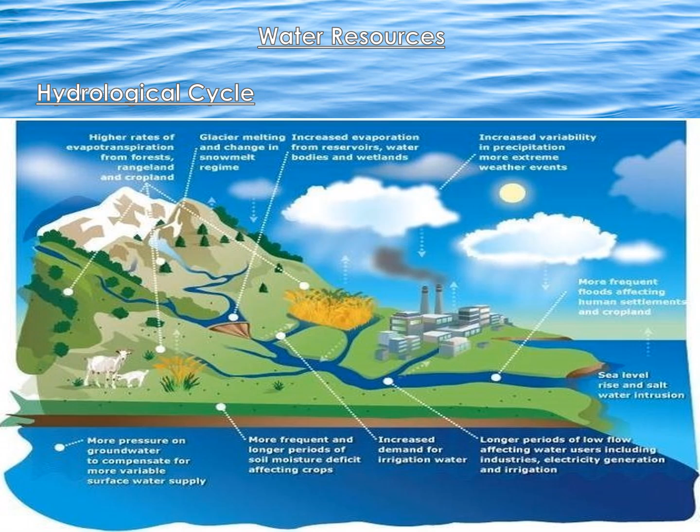In the picture, you can clearly see how the hydrological cycle actually works.

Now, if we talk about the importance of rivers to Pakistan, we can see that it attracts tourism due to scenic beauties, provides water to rain-fed areas, is used in various industries, and alluvium increases the fertility of the soil. It is important for the inland fishing industry, helps generate hydroelectricity, and is used for domestic purposes and for irrigation purposes.

Then, if we talk about the river systems of Pakistan, we have a very good river system. We basically have two river systems: one is the Indus water system and the other is the rivers of Balochistan.

Firstly, we'll talk about the Indus water system. It has two tributaries, two parts: eastern tributaries and western tributaries. The Indus water system is the largest river system of Pakistan, based on the largest river, the Indus.

It is watered by glaciers of the Karakoram and Hindu Kush, enters the plains of Punjab and Sindh, and irrigates about 60% of Pakistan's cultivable land. The Tarbela Dam is constructed on River Indus.

The eastern tributaries of River Indus are Jhelum, Chenab, Ravi, and Sutlej River. The western tributaries of River Indus are Kabul, Kurram, Swat, Tochi, and Gomal.

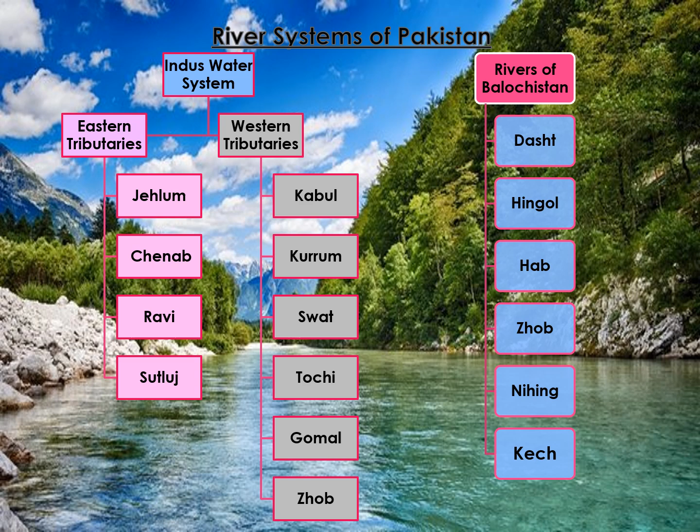The main rivers are Dasht, Hingol, Hab, Zhob, Nihing, and Kech. These are mostly small rivers or seasonal rivers, and they make up the rivers of Balochistan.

Then we have uses of water. We all know these uses, but I will quickly tell you about them. We can divide the uses of water into three domains: domestic uses, industrial uses, and agricultural uses.

In domestic uses, we use water for drinking, cooking, washing, and sanitation. For industrial purposes, we use water for the pharmaceutical industry, tanning, food processing, textile industry, chemical industry, mineral water, iron and steel industry, thermal power, and hydroelectricity.

Then, if we talk about agricultural uses, we use water for irrigation purposes.

Then, if we talk about groundwater, it refers to the water beneath the earth's surface. Pakistan faces water scarcity, making irrigation crucial for crop cultivation. Both ground and surface water are utilized for irrigation purposes. Tube wells, karezes, and wells tap into the groundwater, while canals, diversions, and sailaba are used for surface water. We are going to see these types in the later slides.

In arid regions like the Balochistan Plateau and deserts, groundwater is vital for irrigation in the absence of sufficient rainfall. Urban areas like Karachi experience water shortages due to population growth, leading to groundwater extraction for domestic use. Groundwater can be saline or sweet, being non-saline near recharge sources like rivers and canals.

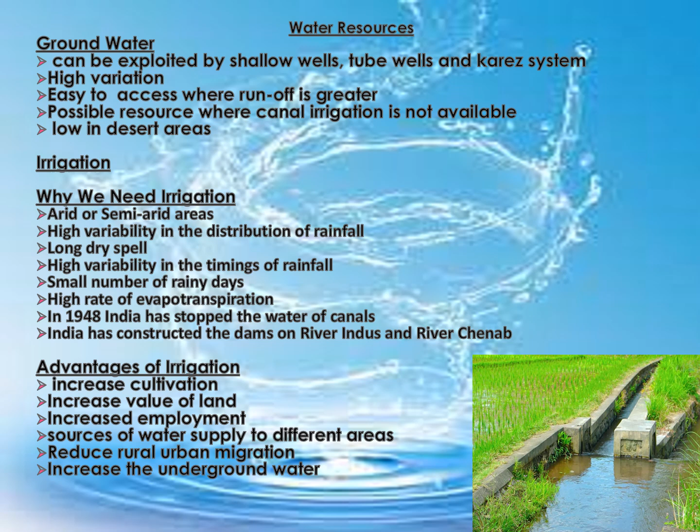If we talk about the disadvantages of irrigation: it is a supply-based system, operational and maintenance cost is very high, and it also causes waterlogging and salinity if the canals are not lined.

Now, if we talk about the factors leading to the development of the canal irrigation system in Pakistan, we can see that we have cheap labor, and availability of cement reduces the cost of canal construction. We also have an automatic natural southward slope of the rivers, which makes the construction of canals easier because water flows southward naturally.

Huge quantities of water from monsoon rainfall and melting of snow can be stored in reservoirs during the summer season. Irregular supply of water in the rivers is then regulated by construction of dams and barrages. Soft soil and level land of the Indus plain makes digging of canals easier than in the rugged lands of Balochistan.

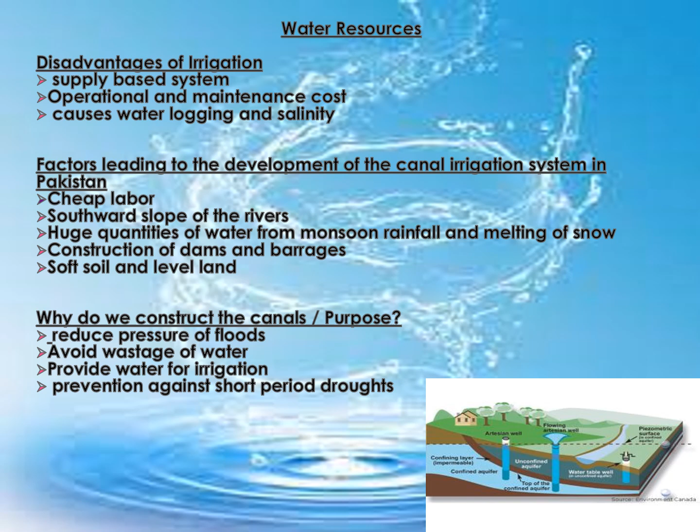So why do we construct canals? What is the purpose? To reduce the pressure of floods. We also use it to avoid the wastage of water and to provide water for irrigation. And also it takes a prevention method against short period droughts, so we can use this water anytime.

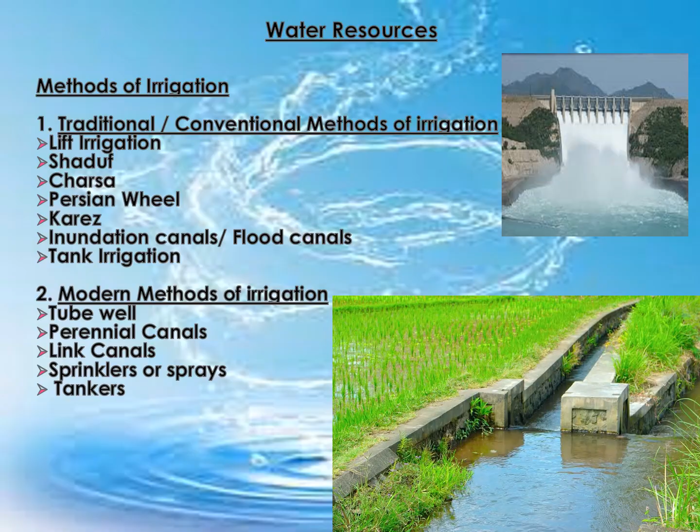Now, if we talk about the methods of irrigation, there are two methods: traditional methods and modern methods. In traditional methods, we have lift irrigation, shaduf, charsa, Persian wheel, karez, inundation canals or flood canals, and tank irrigation. In modern methods of irrigation, we have tube wells, perennial canals, link canals, sprinklers or sprays, and tankers. We are going to see them in detail.

First of all, let me tell you something about lift irrigation. It is among the oldest irrigation methods in Pakistan. In ancient times, water was manually lifted using buckets attached to ropes from shallow wells and ditches. Due to the labor-intensive nature of this method, only a limited land area could be irrigated using lift irrigation.

Let me tell you one thing: we are talking about the methods of irrigation, not the methods of getting water for domestic uses. We are just concerned with the irrigation methods.

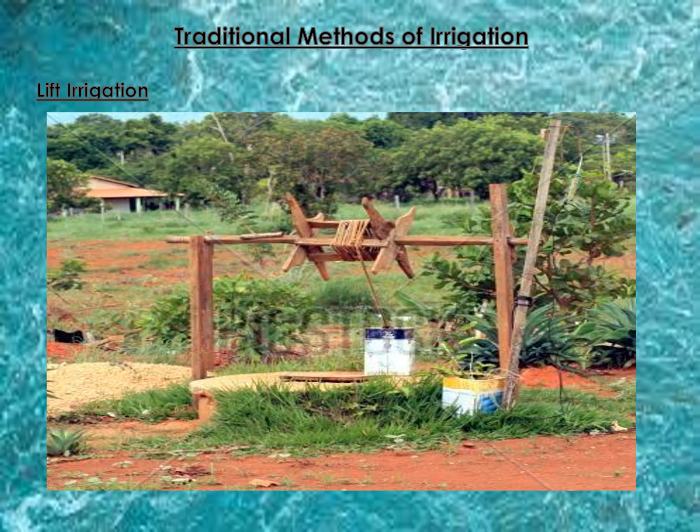So the second one is shaduf. The shaduf is a traditional irrigation tool comprising a pole with a suspended bucket on one end and a weight, such as a rock, on the other end.

The pole is supported on a Y-shaped post near a well or a river bank. The bucket is manually dipped into the water and the weight aids it lifting again. Due to its labor-intensive nature, this method is outdated and only a small area, approximately 1/10 of a hectare, can be irrigated with this effort.

Now, if we talk about charsa, animal-powered irrigation involves using animals to pull a bucket suspended by a rope through a pulley near a well, as you can see in the picture. This innovation allows for the extraction of water from wells at depths ranging from 5 to 7 meters. With the assistance of animals, a larger area could be irrigated using this method.

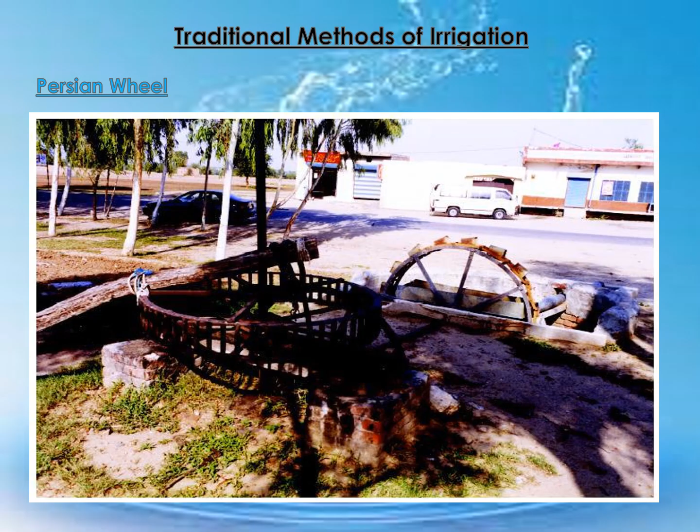Now, Persian wheel involves lowering a series of buckets into a well on a chain, ensuring a continuous water supply. Hundreds of empty buckets descend into the well and emerge filled with water in a cyclical manner. This method allows access to water at depths ranging from 23 to 26 meters and is typically powered by a pair of bullocks or camels.

Alongside the charsa, the Persian wheel is one of the dominant and long-lasting lift irrigation methods in Pakistan, utilized for several centuries, and still used in some of the villages of Pakistan.

Now then we have the karez system. The karez is an underground water tunnel that originates at the base of a hill or a mountain, tapping into groundwater, extending to 1 to 2 kilometers and sometimes up to 10 kilometers.

The karez serves to irrigate orchards and agricultural fields. Vertical shafts along the length of the karez facilitate cleaning, repairs, and water extraction for domestic use. Regular maintenance ensures the karez remains productive for a century or more.

Typically owned collectively, the water distribution is based on individual shares held by the group of owners. Site selection is done by experienced villagers, and the digging and maintenance involve a group of trained labor. The main challenge with the karez is the inability to stop water flow, and the maintenance proves to be a challenging and expensive task.

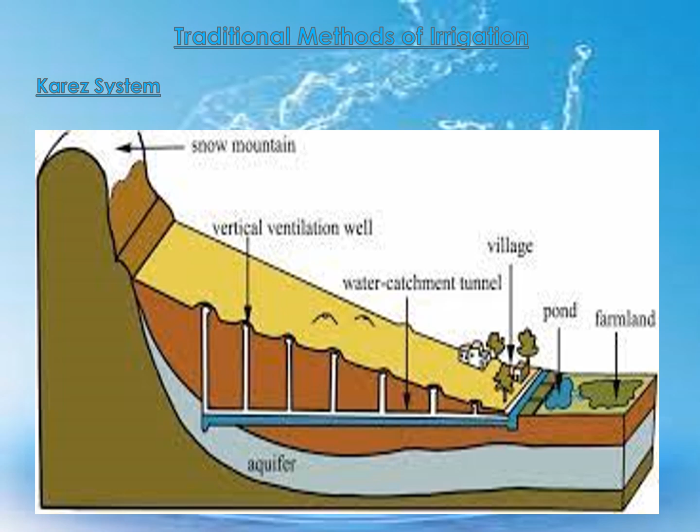If we talk about the advantages, continuous supply is there, but it is less important now due to lack of government investment. Now, next, we have to see the inundation canals or the flood canals.

These are the seasonal canals, designed to provide water to fields during the summer, typically operational during the rainy season and closed in winters. These canals provide advantage for the kharif crops.

Rabi crops benefit from the residual moisture left in the land after the summer flooding. These canals specifically irrigate active floodplains with a good level of water, and the primary network of these canals is in Sindh and southern Punjab regions.

Now, if we talk about the advantages of these canals, they are made to reduce the flood pressure and are useful for lower areas like Sindh and southern Punjab.

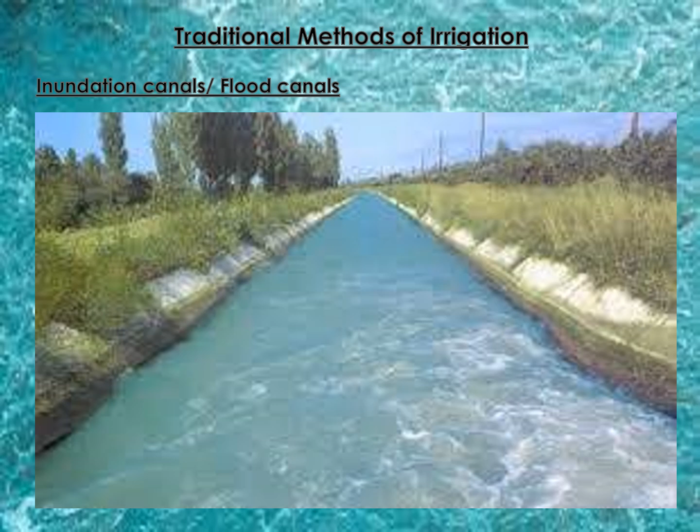Now, if we talk about the disadvantages of these seasonal canals, they do not supply water throughout the year because they are seasonal, and only a single crop can be cultivated with these canals. They also do not supply water to the upland areas in the northern Indus plains or upper Indus plains.

Now, if we talk about tank irrigation, it is a method of providing water for agriculture by storing it in artificial reservoirs or tanks, which are filled during the rainy season and then used to irrigate crops during dry periods.

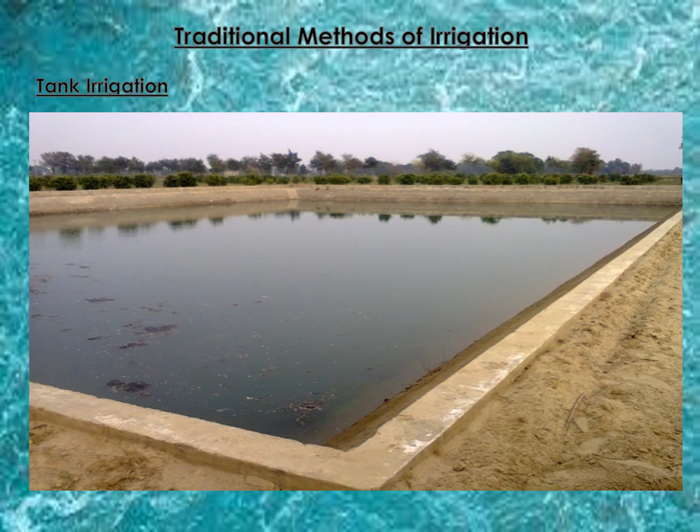Now, let's study about the modern methods of irrigation. Number one is tube well. They represent a relatively recent inclusion in Pakistan's irrigation infrastructure. It is capable of accessing water at depths of several hundred meters.

These wells are powered by diesel or electric motors. Tube wells play a very crucial role in lowering the water table and safeguarding the land from issues like waterlogging and salinity. If the land is waterlogged or salinated, which I am going to explain later on, tube well installation in that area would help to lower down the water level.

There are many advantages of the tube well. For example, it is more efficient, it is faster, a larger area can be irrigated, there is regular supply of water, cleaner water supply would be there, it reduces water logging and salinity, and less labor is required.

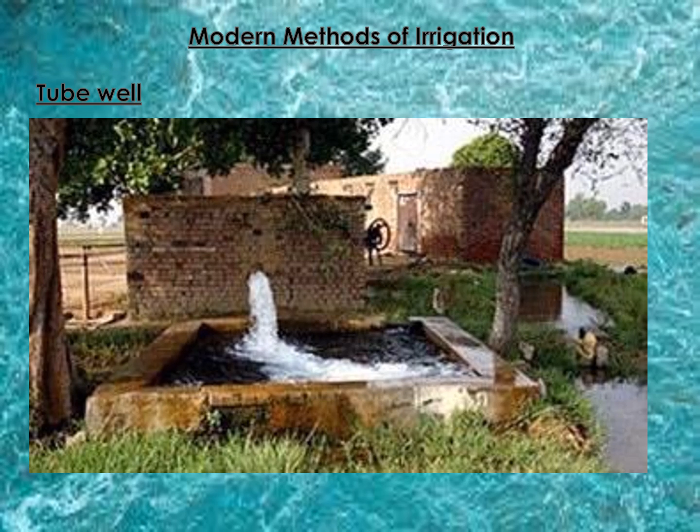But there are some disadvantages of the tube well as well. For example, it is expensive, cannot be used by poor or subsistence farmers, maintenance is very difficult and expensive, and the fuel, diesel or petrol, is expensive. Spare parts are also expensive. It reduces the groundwater and lowers the water table.

Then we have perennial canals. These canals bring water to the fields throughout the year and are useful for both crops. These canals have been taken out in bar upland areas from the dams and barrages. They have some advantages like supply of water around the year. Both crops are benefited, like Kharif and Rabi, both crops provide water to the higher areas.

And they have two types. Number one is lined canals. Lined canals are paved with cement or brickwork on the bed and the sides.

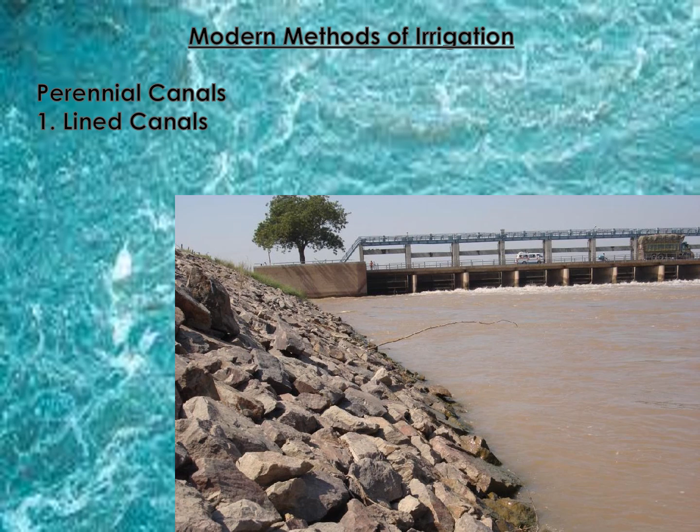Number two are the unlined canals. These canals are without any brickwork. Their bottom and sides are of earth and soil, and that is why it is a major cause of waterlogging and salinity. Disadvantages may include that it raises the water table to the surface level and creates waterlogging and salinity, as I just told you.

Then we have link canals. These canals carry water from one canal to another. As its name depicts, a link canal links different rivers from another river, and it is used to control irrigation purposes. If in some river there is less water for irrigation purposes, link canals could be used to take water from another river so that the area would be irrigated.

For example, if there is less water in the Ravi river, the Qadirabad-Balloki link canal can take water from the Chenab river and put it into the Ravi river, so that this area of Ravi can get water for irrigation. So we have different link canals like Rasul-Qadirabad, Balloki-Sulaimanki, Marala-Ravi, Bahawal, Taunsa-Panjnad canal. We have many link canals, which are very good for our irrigation system.

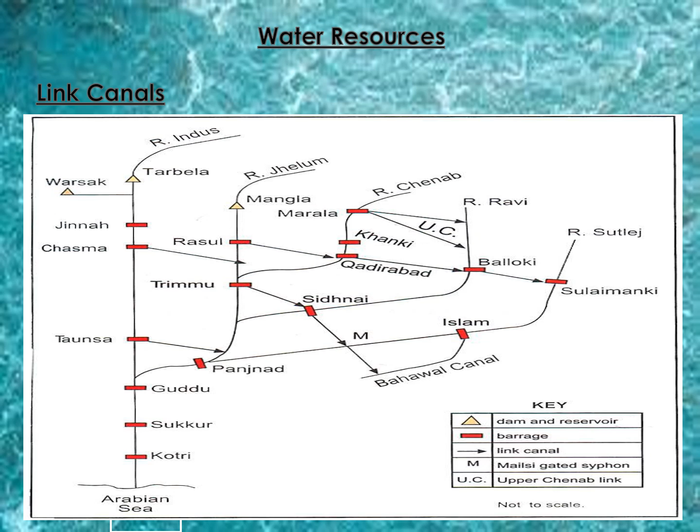Then let's move to sprinklers or sprays.

Sprinkler irrigation is a crop irrigation technique employing pipes, pumps and sprinklers to distribute water in droplets and mimic natural rainfall. This method is known for its efficiency in water distribution and is widely adopted in agriculture for irrigating extensive areas.

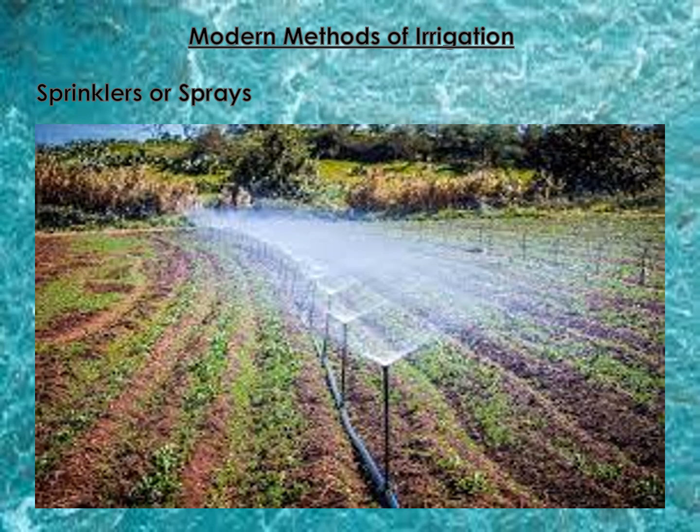Then we have tankers. Tanker irrigation utilizes water tankers or trucks to transport and distribute water for agricultural irrigation. This approach is commonly employed in regions with limited traditional irrigation infrastructure, enabling farmers to deliver water directly to fields through mobile tanker units. But it is not widely used in Pakistan.

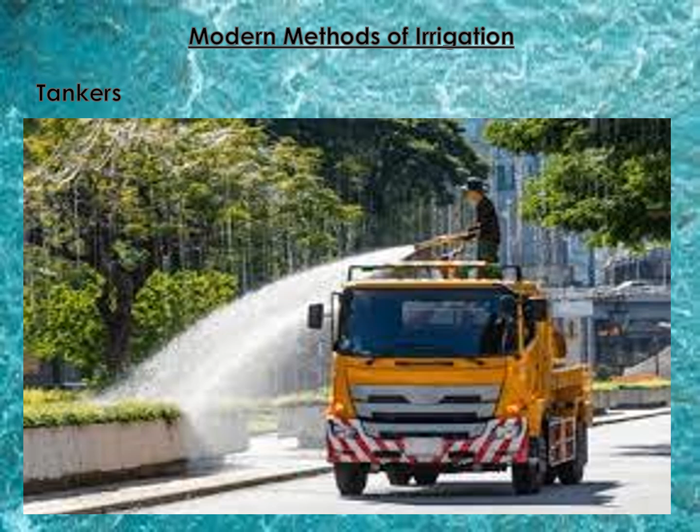Now, if we talk about the effectiveness of conventional methods of irrigation, we can see that limited areas are irrigated due to less amount of water. It requires manual labor or animal power, is more time consuming, and difficult to maintain, build and use, like the karez system.

If we talk about the advantages of modern irrigation systems, they are efficient and faster. They irrigate large areas, reduce waterlogging and salinity, and can be used anytime.

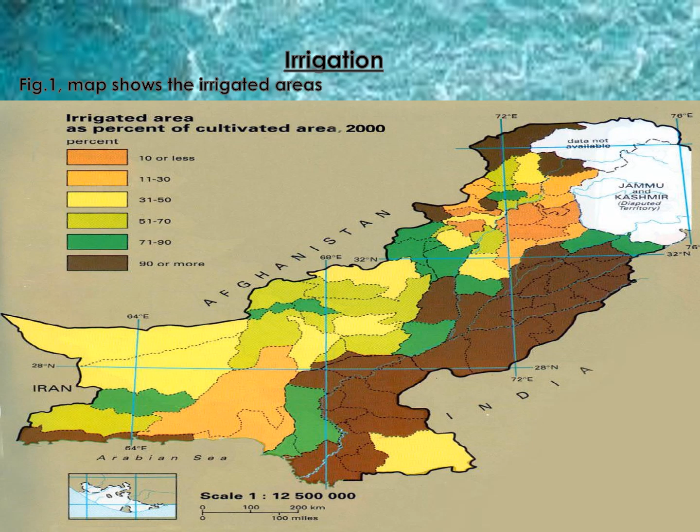This map shows the irrigated areas of Pakistan, and the areas which are brown in color are the most irrigated areas in Pakistan. Now, if we talk about the Indus Water Treaty, in 1947 the creation of Pakistan led to the division of Punjab province, with parts allocated both to India and Pakistan.

The headworks of Madhopur on the Ravi and Ferozepur on the Sutlej ended up in India, and many canals stemming from these points were vital for the irrigation of Pakistan.

But in March 1948, India halted the flow of water into the Pakistani canals, and Pakistan wanted to address this issue through negotiations. There was an interim agreement initially, but seeking a permanent solution, discussions were again commenced in 1952 with the assistance of the World Bank.

In September 1960, the Indus Water Treaty was signed, granting Pakistan exclusive rights over the western rivers like Indus, Jhelum and Chenab, and India over the eastern rivers like Ravi, Beas and Sutlej. A transitional period extendable up to March 31, 1970 was established, during which India committed to supply water to Pakistan.

Simultaneously, Pakistan was expected to construct 2 storage dams, 5 barrages, 1 gated siphon and 8 link canals diverting water from western rivers to the eastern rivers. The construction costs were to be covered with aid from the United States, the United Kingdom, Germany, Canada, Australia, New Zealand, and India was also responsible for a portion of the cost.

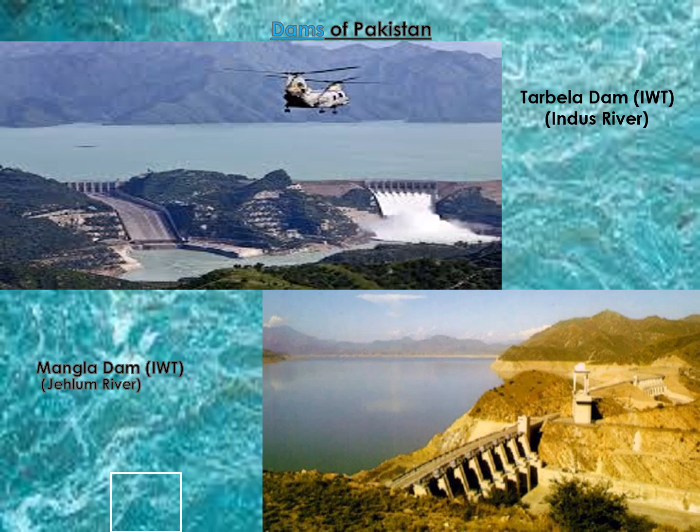Now, dams. A dam is basically a man-made structure built across a river in order to control the flow of water and use water for irrigation. Following are the types of dams you can see in the picture.

The first one is the Tarbela Dam, which was made in Pakistan through the Indus Water Treaty. As part of the treaty, 2 storage dams had to be made, so they made Tarbela and Mangla Dam.

Tarbela Dam is on river Indus, approximately 47 kilometers from Attock, and it is a multi-purpose project. It is designed to store 11 million acre feet of water and generate 2.1 million kilowatts of electricity, and its primary function is to supply water to the Chashma Jhelum Link Canal and different parts of Punjab.

The Tarbela Dam also provides water to different link canals, and with a height of 143 meters and a reservoir area of 243 square kilometers, it boasts 9 large gates to control water outflow. It is recognized as the world's largest earth-filled dam. Tarbela features 2 significant spillways from the reservoir, adding to its impressive attributes.

Then, if we talk about the Mangla Dam, which you can see in the picture, it was completed in 1969, and it is situated on river Jhelum with a storage capacity of 5.5 million acre feet. It is planned for the future to include the potential to raise storage capacity to 9.6 million acre feet.

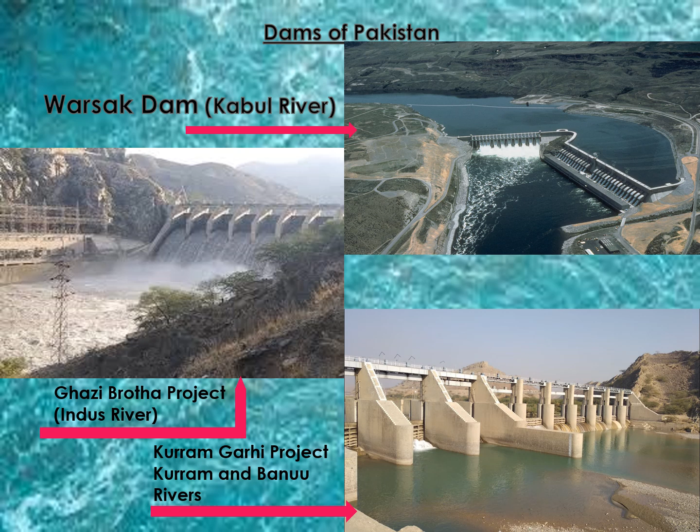Then we have Warsak Dam, which is a multi-purpose project strategically designed to supply water for irrigation and generate electricity. It is on the Kabul River, approximately 32 kilometers from Peshawar. The installed capacity of Warsak Dam is 240 megawatts.

Now then we have Kurramgarhi Dam. It is located on river Kurram at Kurramgarhi. The dam provides water to Bannu civil canals and has improved the irrigation of 530 square kilometers of land.

Then we have the Ghazi Brotha project, which is again on the Indus River near Ghazi town. It is a large project with a capacity of 1450 megawatts. It is expected to be completed soon.

Then we have small hydel plants. Pakistan hosts several small hydel plants with a combined installed capacity of 107 megawatts, for example Renala and Rasool, located on different canals, upper and lower, of Punjab.

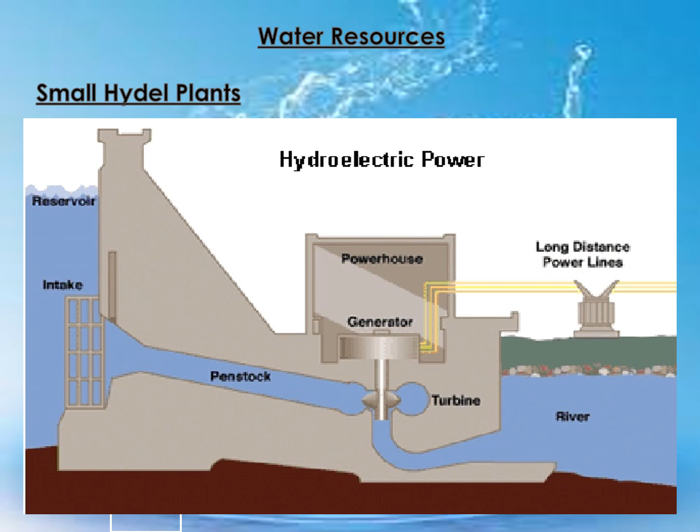And then we have small dams. In addition to major irrigation projects, several dams have been constructed in the Western Highlands, providing irrigation facilities and electricity to the valley areas. Then if we talk about the main features of hydel plants, the dam wall is constructed to create a water reservoir.

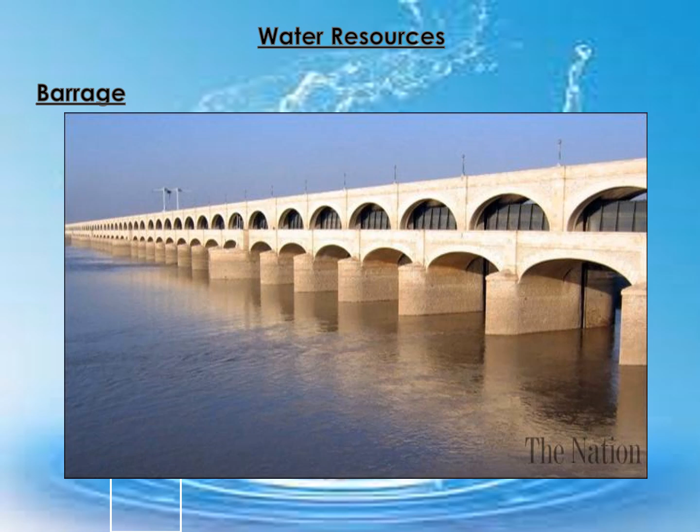Basically, a barrage is a structure built across a river in order to store water and use it for irrigation. We have 5 barrages and a gated siphon from the Indus water under the Indus Water Treaty, and then we made some more barrages afterwards. The barrages under the Indus Water Treaty are Chashma Barrage, Rasool Barrage, Marala Barrage, Kadirabad, and Mailsi siphon.

If we talk about siltation, siltation is the process when mineral deposits, soil, and sand cover the bed of the river, and it creates a lot of flow issues in the river water. The main effect of siltation is that it reduces the water storage capacity of the river.

If we talk about the methods to control siltation, we should plant trees along the hill slopes surrounding the river valley. We should build small dams in the river upstream from the dam, and we should build small dams in the tributary streams joining the main river, so that this silt cannot reach the bigger dam reservoirs.

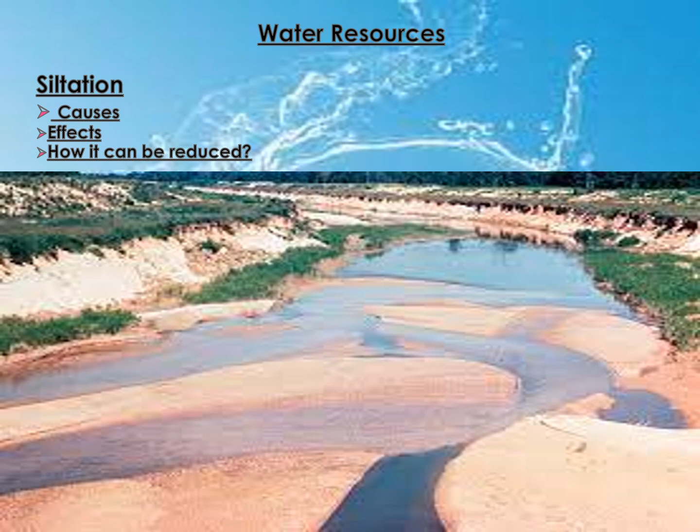If we talk about the causes of waterlogging: water is available all year, crops are given more water than they use, the water table rises to the surface level, and fertilizers add salt to the water. The salts left behind form a hard crust on the surface, and then the soil and land become infertile and even toxic.

If we talk about salinity, it results from the evaporation of waterlogged land and salt in irrigation water. Salts are brought to the surface, mostly because there is an unlined canal nearby, so water is logged underground, and it eventually becomes salinated land.

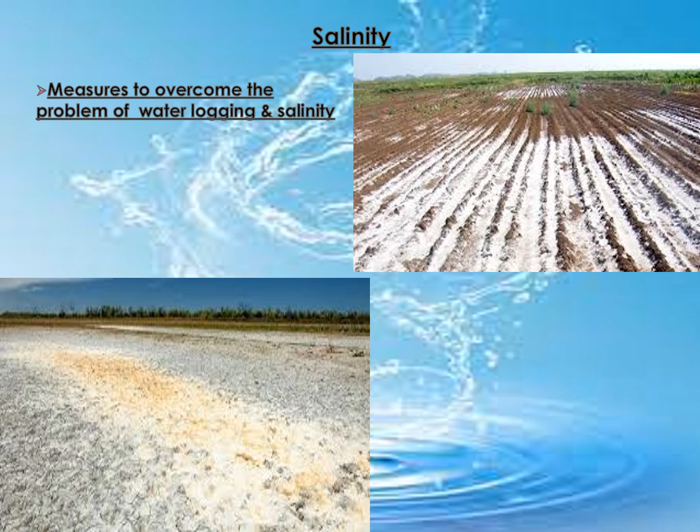Now we have to see what government schemes the Government of Pakistan has chalked out. They launched a reclamation project to solve the problem of salinity and waterlogging, and named it the SCARP project: Salinity Control and Reclamation Project.

There were a total of 5 SCARP projects. SCARP 1 reclaimed land in Rachna Doab, including Faisalabad and Sheikhupura. SCARP 2 covered the area of Chaj Doab, where thousands of tubewells were made and canals were lined.

SCARP 3 was done in the areas of Jhang and Muzaffargarh, and SCARP 4 and 5 were done in the areas of Khairpur and Rann of Kutch in Sindh, where canals were lined and tubewells were made.

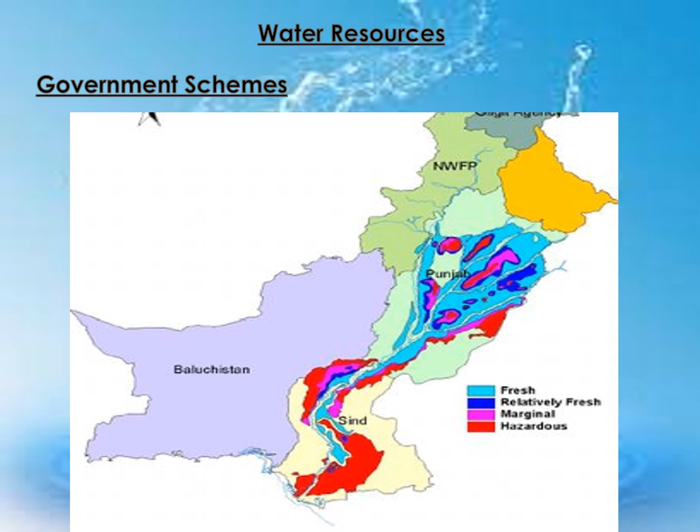If we talk about surface water pollution, there are many causes: releases of different kinds of pollutants, disposal of industrial waste and chemicals, use of different fertilizers and pesticides, runoff of excess chemicals into the water, disposal of litter, oil and chemicals into freshwater streams, urban runoff carrying polluted items, and discharge of untreated or poorly treated sewage.

There is inadequate sewage infrastructure mostly in Pakistan. Then there's discharge of different oils, disposal of garbage, sediment runoff from construction sites, and disposal of construction waste into freshwater streams. These are all causes of surface water pollution.

What are the disadvantages and problems? Contaminated water can cause waterborne diseases, and polluted water may lead to illnesses like stomach aches and stomach issues. It is harmful for the aquatic ecosystem, and pollution can contribute to the decline of certain species. Soil quality may degrade, there can be economic loss, and water pollution could impact climate change as well.

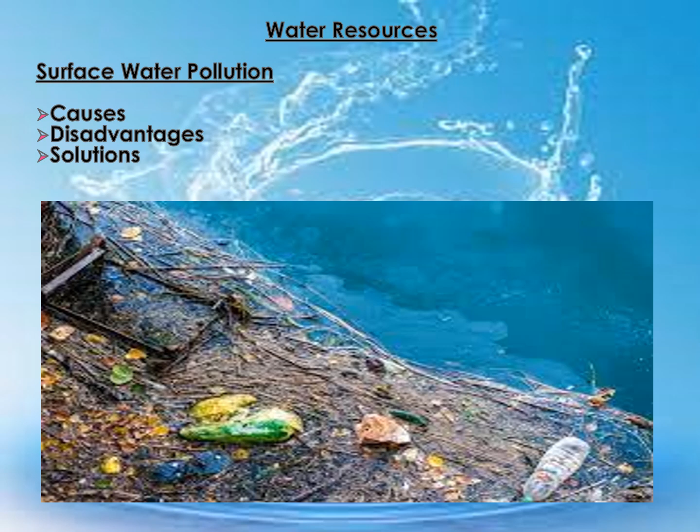Fostering a sense of responsibility and ownership for the local water source should be done. If we talk about water as a resource for economic development, agriculture use is there, for crops and agro-based industries water is used, and it eventually increases economic development. Then processing and manufacturing industries use water, like cotton industry and leather industry. Domestic household water is also supplied. So eventually it is used as a resource for economic development as well.

Now, if we talk about minor irrigation systems, we have the Karez system, which I have explained in the earlier slide in much detail.

Now I'm going to move towards the diversion canal, which is practiced mostly in Western Highlands. In the diversion canal, water is taken off from narrow streams through small man-made channels to irrigate small areas, and this can only be done when the river is full. Diversion canals are also called Kurjo in Makran, and this form of irrigation is practiced over a large area from Chitral to Makran. Then we have Sailaba.

Sailaba irrigation is used for the surface runoff of the hill slopes. Whenever a sufficient quantity of rainfall takes place, water flows down the hill slopes and reaches the plains. So where the agricultural fields are located, this water is diverted into the fields and nourishes the crops. Of course, a sufficient quantity of rainfall does not take place every year, so this method of irrigation has limited utility. The available water is never enough to irrigate a large area of land. Basically, the water which comes from the hills to the plain areas and is diverted to the croplands is called Sailaba. Then we have groundwater, which I have already explained earlier.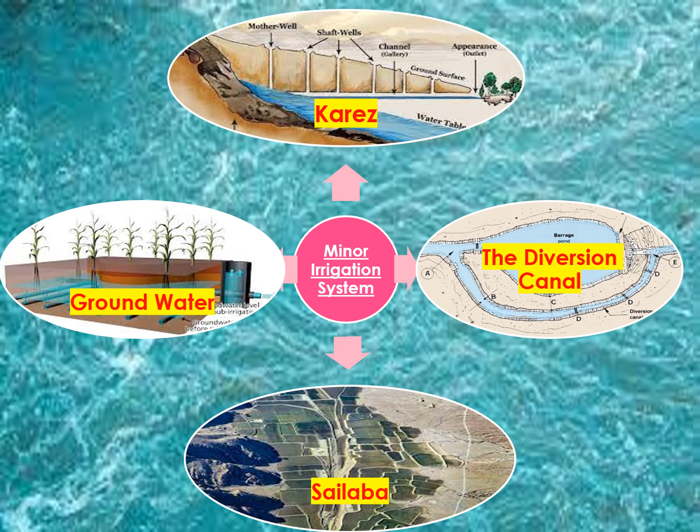Now let's see the water supply issues of Pakistan. There are some international water supply issues and some provincial. First we'll see the international ones.

Impact of the Indus Water Treaty: Pakistan had to give the exclusive rights of three eastern tributaries like Satluj River and Beas. So the upper Indus plain faced a decrease in water supply as a consequence of transfer of this authority. To tackle the water scarcity, Pakistan initiated the construction of Tarbela and Mangla dams. Additional barrages and canals were developed, and the agreement governing this arrangement continues to be an issue resolving between Pakistan and India.

Then we have provincial issues. The first one is the Punjab and Khyber Pakhtunkhwa issue on the Kalabagh Dam. Kalabagh Dam is a significant source of disagreement among the provinces, particularly with the objections of KPK raised on various grounds. One concern involves the potential diversion of a considerable portion of water stored in the Kalabagh Dam reservoir to Punjab through link canals, as they think. And despite electricity generation by the dam being distributed nationwide through the national grid system, KPK is not expected to receive any additional power benefits from the project. The construction of the dam is also anticipated to result in substantial displacement of the people living in that particular area, and people of that area do not agree with that. The reservoirs are projected to submerge extensive areas in Nowshera district, leading to further issues such as waterlogging and salinity.

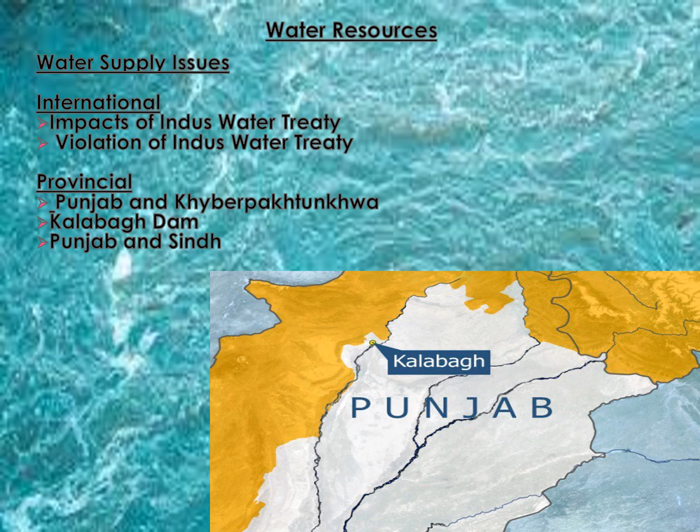So this was the chapter of water resources. I hope it is clear to you, and we'll see you, inshallah, in the next video. Thank you.